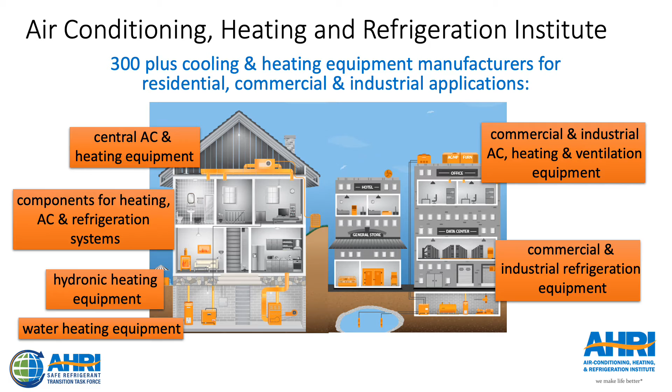AHRI is an association of manufacturers from around the world, 300 manufacturers headquartered in virtually every continent in the world, producing cooling, heating equipment for residential, commercial, and industrial applications. This is detailed on the slide that you are looking at the present time. AHRI is located in the United States in Arlington, Virginia, which is directly across the Potomac River from Washington, D.C.

I specifically want to direct your attention to one of AHRI's task forces, the AHRI Safe Refrigerant Transition Task Force. The task force is charged with looking at and examining low global warming potential refrigerants for direct HVAC applications. The responsible staff person, Helen Walter-Terrinoni, is listed below the title, as well as links to the websites of the task force.

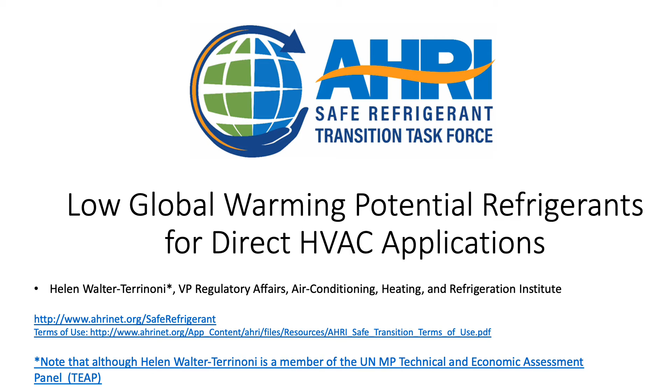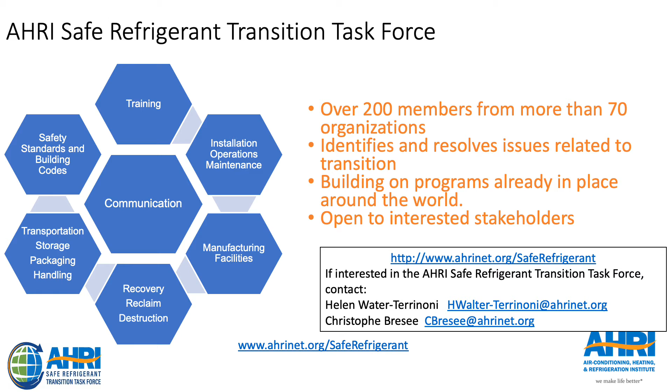With respect to the work of the task force, there are over 200 members from more than 70 associations. Their task is to identify and resolve issues related to the transition and, very importantly, to build on programs already in place around the world. It is open to interested stakeholders. It is not about doing everything over. It is about recognizing, cataloging, and building on what has already been done. The areas that the task force looks at are outlined in the blue blocks to the left.

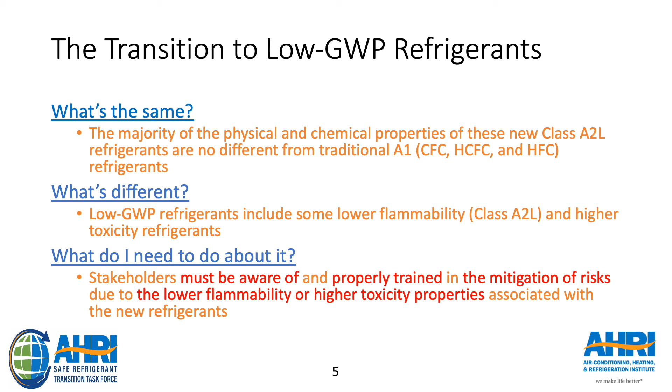So this transition to low GWP refrigerants, some things are the same. The majority of the physical and chemical properties of this new class, A2L, of refrigerants are no different from traditional A1 refrigerants. However, there are some differences. Low GWP refrigerants include some lower flammability, class A2L, and higher toxicity refrigerants. And what we need to know is that stakeholders must be aware of, and properly trained in, the mitigation of risks due to the lower flammability or higher toxicity properties associated with the new refrigerants.

As stakeholders, we need to look at regulatory, safety standard, and building codes that exist, the current roadmap, and see how they can be revised and applied across different jurisdictions. Training has to be shared internationally. And as always, there has to be significant communication and network to ensure that we share and leverage learnings from one another.

The goal of standards in this particular activity, quite simply, is to prevent ignition. In order for a refrigerant ignition to occur, there have to be two failures. The refrigerant leak must exceed the lower flammability limit, LFL: 10 to 14% LFL concentration, a large refrigerant release. And there must be a competent ignition source, minimum ignition energy, in an area that exceeds the LFL. It has to be an open flame or a very high energy ignition source.

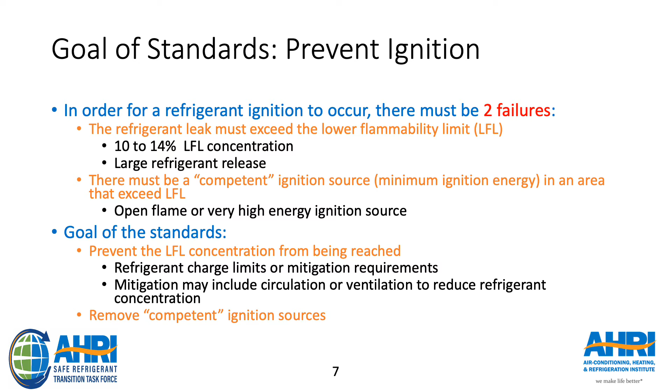The goal of the standards is to prevent the LFL concentration from being reached. This can be by refrigerant charge limits or mitigation requirements. Mitigation may include circulation or ventilation to reduce refrigerant concentration, and of course, removing competent ignition sources.

Already, there's over $7 million worth of research results available in the United States, and current research from all over the world will support optimization for future products. The objective is quite simple, related to the safe use of flammable refrigerants, and make results available for public safety and awareness.

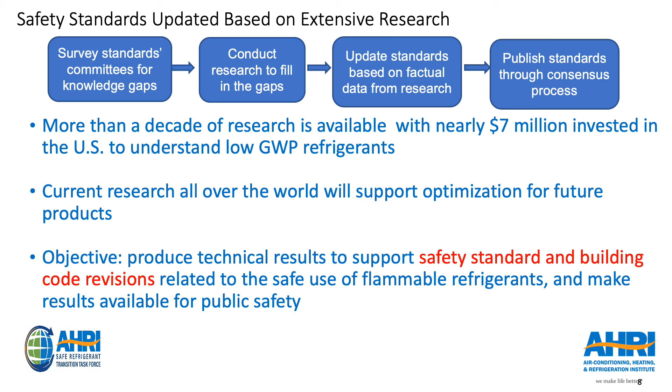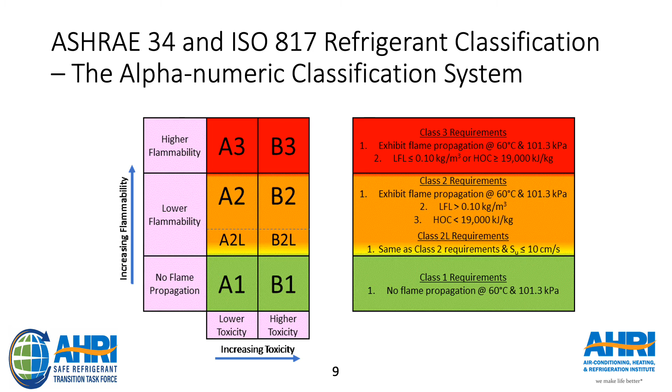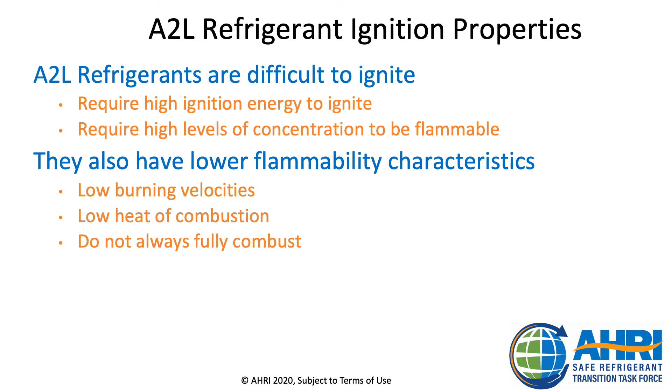A2L refrigerant ignition properties, I'm sure you're familiar with. A2L refrigerants are difficult to ignite. They require high ignition energy. They require higher levels of concentration to be flammable. They also have lower flammability characteristics. This is very important. Low burning velocities, low heat of combustion, and they do not always fully combust.

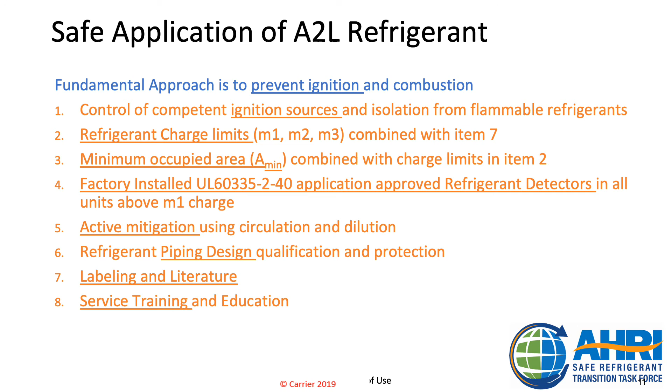In looking at A2Ls, the fundamental approach to prevent ignition and combustion are these 8 steps. I certainly will not read them all to you. You're probably familiar with them. I will emphasize number 8, and I'll come back to that later. So important in this transition is service training and education. That is an area that must receive additional unprecedented emphasis.

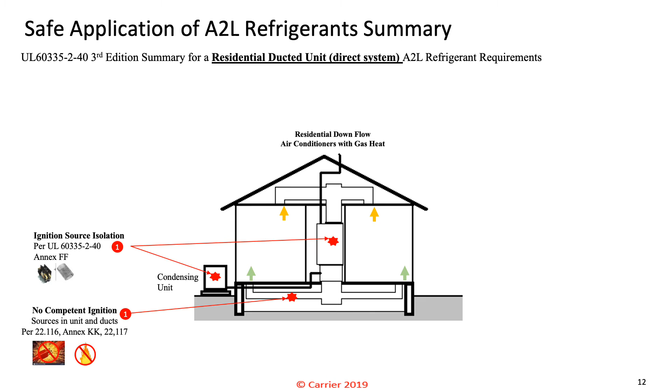This is simply a diagram that shows the safe application of A2L refrigerants. I'll fill it up with a very complex series of notes, which you are free to read at your free time, but they basically cover pictorially what I just reviewed.

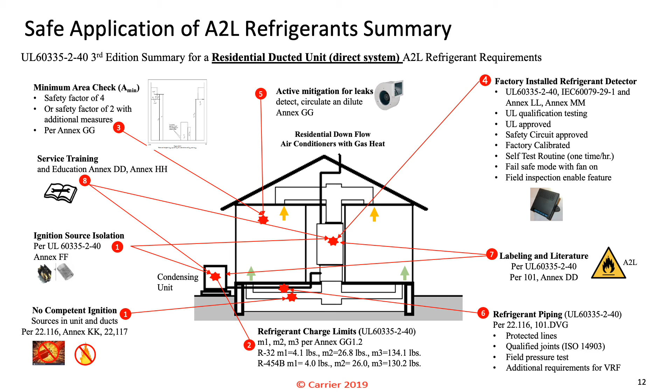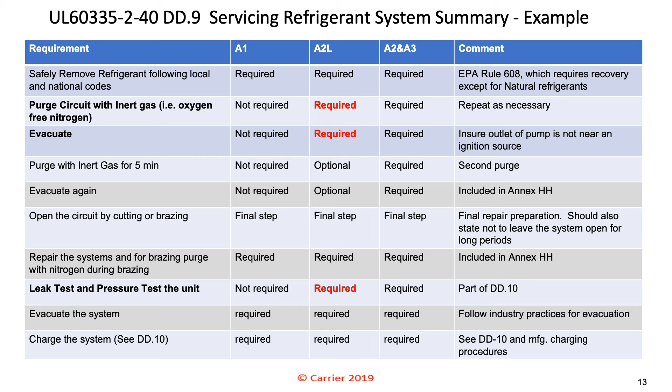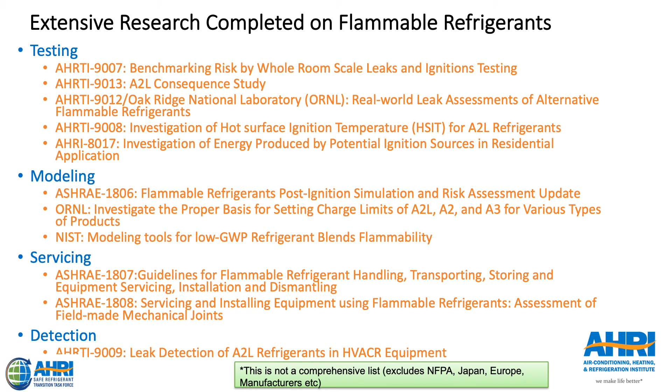Other studies have been done by the National Fire Protection Association, studies in Japan and Europe. There has already been a lot of work done, and that means a very careful identification and cataloging of that work distilled into safe operating practices.

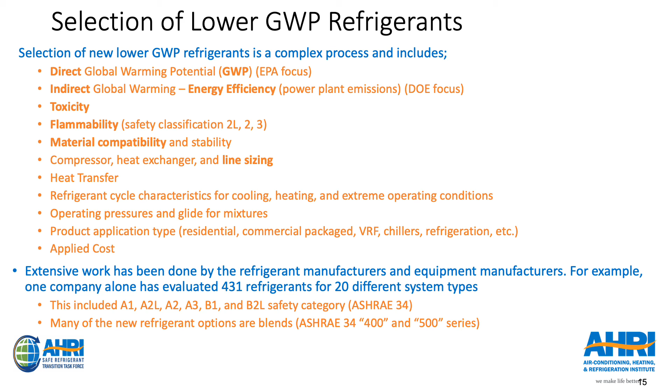All of these areas are important areas to examine, to be aware of, and understand the correlation among the many factors in moving to low GWP. As an example, one company alone has evaluated 431 refrigerants for 20 different system types.

AHRI is working with UN Environment to conduct and build a program that will result in what is called the refrigerant driving license, the RDL, which will be a curriculum and a guide for technician training in Article 5 economies. The training qualification program will be globally recognized and accepted. The program will set minimum requirements for the sound management of refrigerants by the supply chain network.